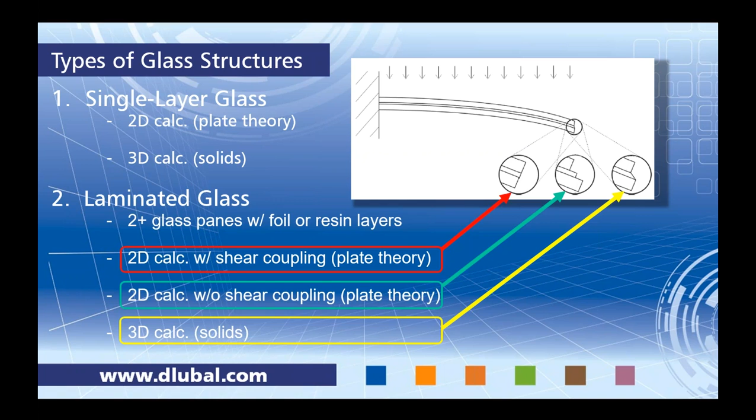Like I said, this is certainly the most accurate option. A downside to this, though, is that your solve time will be longer than typical plate theory.

This will always use large deformation analysis. With the other two glass types, we can do a linear analysis or a large deformation. Typically with plate theory, you're running a linear analysis. But for insulated glass, we actually only give you the option for 3D calculation with solid elements. That's because when you throw in this gas layer, there's really no other way to get the accurate behavior of the shear coupling between the glass layers with anything other than solids, meaning that plate theory with 2D elements is not applicable for insulated glass.

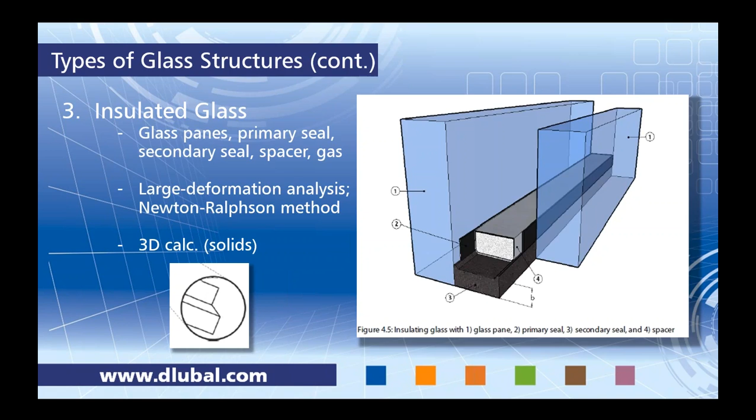So the first being a local calculation. That is where an individual glass surface is analyzed in RF Glass. Despite having any supports or boundary members drawn in RFEM, we have to redefine those supports and boundary members in RF Glass. With the local calculation, we can either do a 2D or 3D plate theory or solid analysis. And with insulated glass, this always falls under the local calculation because we can only do a 3D analysis type with insulated glass.

Now, the other option is a global analysis where the entire model in RFEM is considered. So therefore, things like supports and boundary members that were originally modeled in RFEM will be taken into RF Glass. The caveat with this is that we can only do 2D plate theory for this type of analysis.

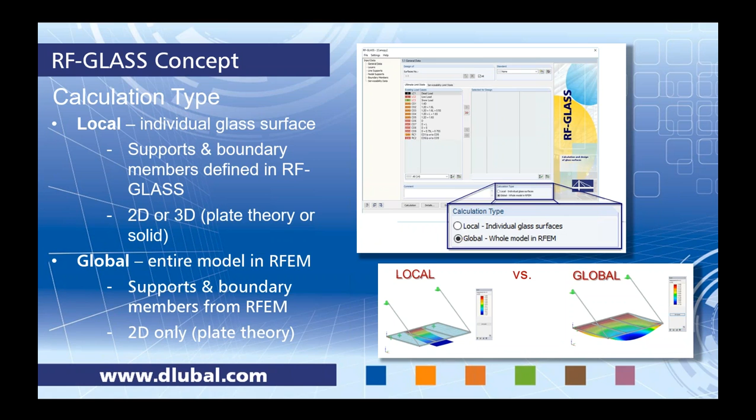So you're probably wondering, well, why would I ever want to do a local calculation if I have to redefine supports and boundary members? Two reasons for that. One, we cannot do a 3D solid analysis with a global calculation. So basically, if you have insulated glass or maybe very thick glass layers that a plate theory won't give you accurate results, the only option is to run a local calculation. The other reason is that the support types as well as the boundary members can be identified in RF Glass in much more detail than what you could ever do in RFEM. That's kind of the advantage. Again, we'll see that when we go through some examples today of local versus global.

So with that, we can jump into RFEM. When you begin a new model, you will see this general data box pop up. We just need to first give it a model name, so I gave it some arbitrary name. I have the load combination set to ASCE 7. You can see here that we have the Canadian load combinations as well as many international codes as well.

And then I have the checkbox to create those combinations automatically. I also always open up my template model. Any model can be saved as a template model, meaning that maybe you have your grid settings the way you'd like, your printout report, your unit set exactly how you want. So then every time you open this template model, everything is ready to go. You don't need to adjust anything next time when you open up a new model. So if I click OK, then this will go ahead and open up a new model for us.

And I'm not going to spend too much time today on modeling techniques. We're really just focusing on glass analysis today, but if you are interested more in general modeling in RFEM, we certainly have plenty more webinars such as this that are recorded on our YouTube channel.

So how I'm going to begin now is I'm going to draw a line element. You can see here that we have obviously a single line element, but we have many more options such as polylines, ellipses, arcs. So basically any CAD-like feature, you're going to find a lot of those in the program itself.

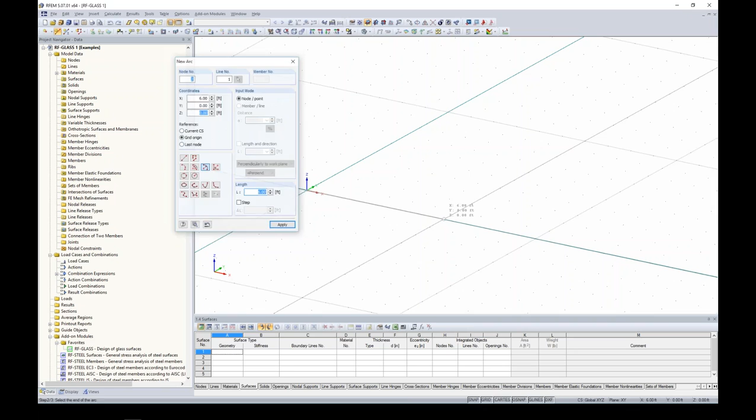For this option, I'm going to choose an arc by defining first my points at 0 and 0, and then I'm going to use my snap point to 6 feet. And then you can see now I want to define my radius. I want to actually reverse the orientation and define my radius at 6 feet.

So now I just have a simple line element. This isn't a member, it's just a line. And then I can actually select this line, right-click, and I can extrude the line into a surface.

If you were present in my last webinar on cross-laminated timber, the glass module somewhat acts the same way. The program is asking us now what material do we want to use when extruding this line into a surface. Realistically, this doesn't matter right now for glass. This concrete is just a placeholder. So it doesn't matter if I choose concrete, steel, or aluminum. It's just simply a placeholder.

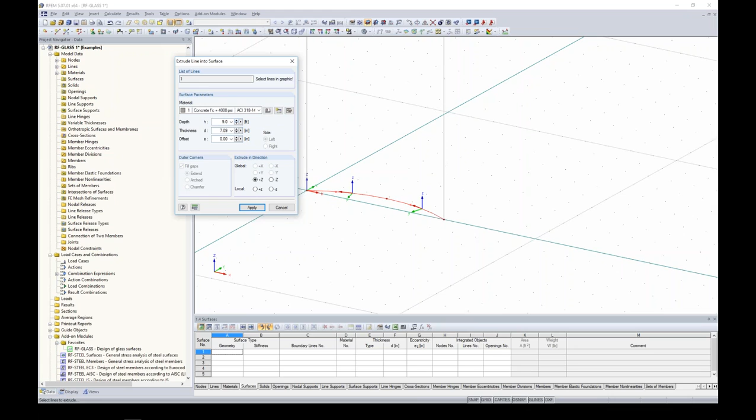The height, though, we do want to specify the correct geometry in the program, with the exception of the thickness. Thickness doesn't matter either because all of our layers and such we will be defining in RF glass. So if I hit apply, then I can see that I have this surface now created with just a few clicks of a button.

The next thing to consider is maybe we have some type of handrail on our glass panel here, and I don't want to model the handrail itself, but I'd like to create a line so that I can add in a line load to this surface.

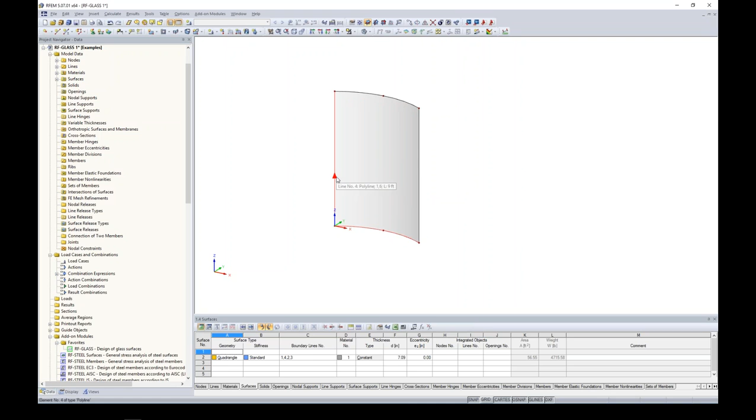So all I'm going to do is select this bottom line here and use my move and copy tool and move it up 3 feet in the positive Z direction. Now you can see that that line is integrated in that surface.

So quickly adding some load cases. Here I will go ahead and add my first load case, dead load, and you can see that the self weight is automatically checked on for self weight.

I'm going to create a new load case called wind load pressure. And you always want to define the correct action category, and the reason why is the program automatically created all of these ASCE load combinations. If you don't apply the correct action category, then you're going to get the wrong load factors.

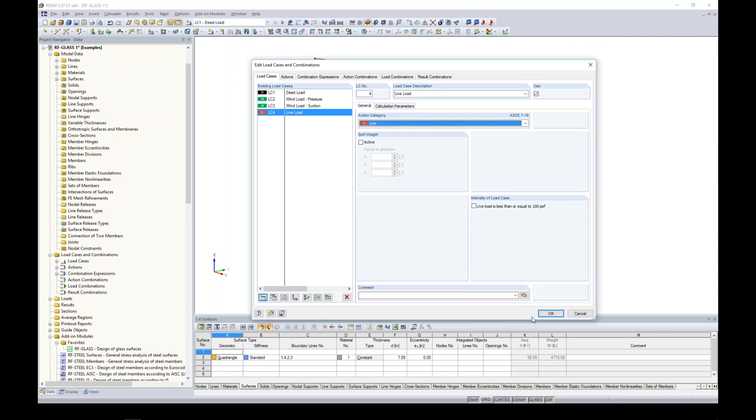So I'm going to make a quick copy of wind load pressure, but call this one suction, and then make one more load case of live load and give it the live action category. Okay, so I can click OK here. Now, if I go to my drop-down box, you'll see that the program automatically created all of those ASCE load combinations. I'm going to skip dead load for now.

We'll just consider self-weight, but wind load pressure, we want to add our first surface load on. If I right-click, I can turn on my local axis system, and I want to add a new surface load. Because we have a curved surface, I want to apply this wind load pressure on my surface in the local Z direction. And you'll notice down here the little picture updates depending on what direction you're applying your load to, which is nice. So in this case, I want the local Z direction.

I want my magnitude to be negative 0.03 KSF. And all I need to do is click on the surface and my area load is applied.

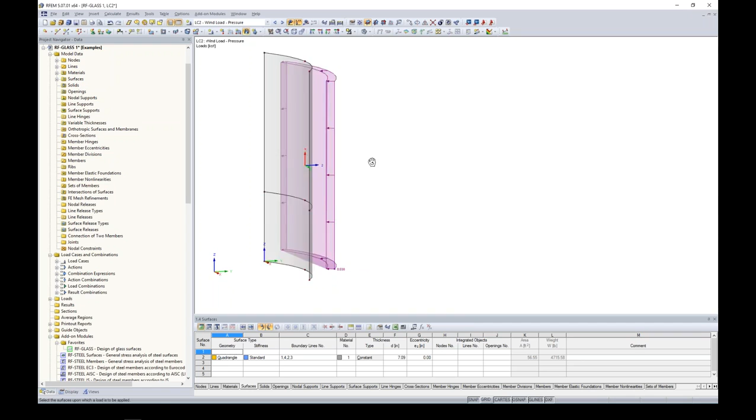I'm going to switch load cases to suction. I'm going to again add a new load in the local Z direction, but this time it will be 0.02 KSF on the other side.

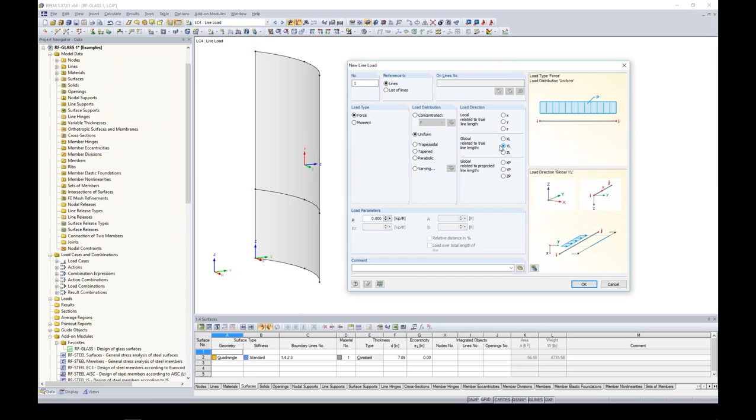And then lastly, we have live load where I will add in a new line load. This I'm going to apply in the global Y direction with a magnitude of 0.07. And then all I need to do is to click on that line.

So now we have all of our loads added to this surface. All of our load combinations are done. I want to check my finite element mesh settings. So if I go to calculate and FE mesh settings, the default is set at 1 foot.

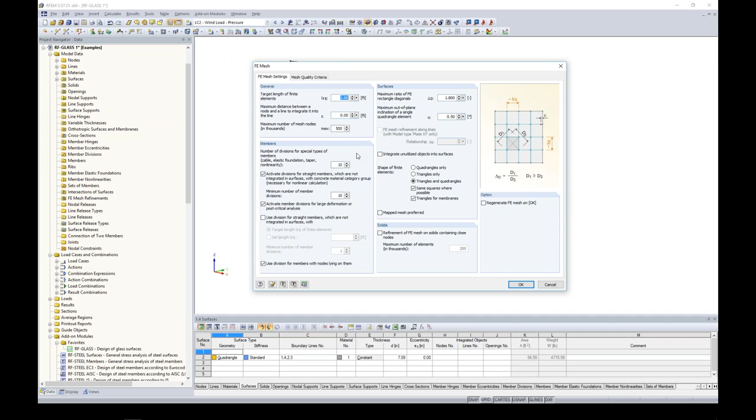The length of 1 foot would probably be okay in this situation since we don't have much going on in this surface, but it's only 6 by 9 feet, so maybe we want to decrease this to something more like 0.5 feet.

If I go to calculate, generate FE mesh, now we can see the FE mesh is automatically generated. Keep in mind this is different from other programs in that all finite element meshing is done automatically. If I were to move this line up an inch, everything would automatically readjust, so you never have to worry about manually adjusting the finite element model. Everything is done automatically.

Now we are ready to jump into our add-on module. We have this extremely long list of add-on modules, but if I right-click on any of them, I can select it as my favorite, which will automatically move it up to the top of the list. So now I can launch RF Glass.

Taking a look at RF Glass, as I mentioned, this add-on module is nothing more than a dialog box. You can see here that all of our load combinations were brought over from RFEM. The first question it's asking is what surface do we want to design, and you can check the all checkbox since we only have one surface.

The other thing to note here is that we do have the German annex for the standard to go ahead and do glass design. For us, we're going to be doing just an analysis, so we will choose no standard. There's a little bit of a translation issue right now, but don't worry, that will be fixed soon - this is 'none' in German.

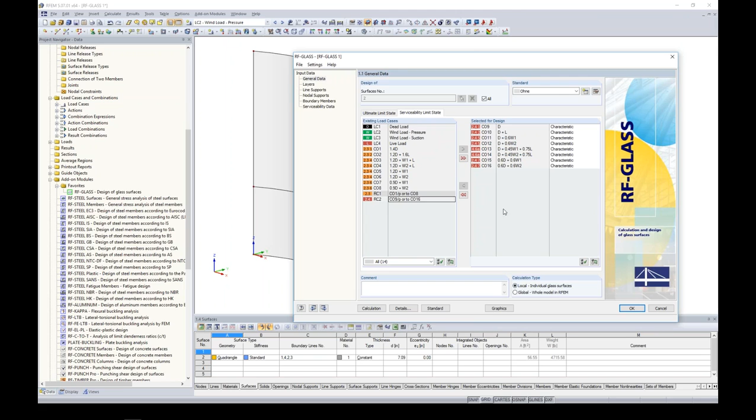Remember back to the PowerPoint, this is what we were discussing on local versus global. My two examples now will be local, so the first one will be local, individual glass surface. We'll focus on that and then get into global a little bit later.

With any add-on module, you simply work down the list. It's extremely intuitive to use - the program kind of sets up your workflow for you. So we're moving on to layers here.

It's asking us, okay, so we can create a new composition. You can rename this, and you can create as many compositions as you'd like for different surfaces in your model. For us, we'll obviously only have one composition for our one surface. We need to select which surface this applies to, and we can define our first layer type.

Our first layer type will be glass, and here will be the option to jump into our material libraries database. Typically the standard, when you select this, will be under the material category glass, and all of these options will be listed. We don't quite yet have the ASTM materials in there, but that's no problem at all.

I added this thermally toughened float glass to my ASTM standard. So anytime you add a new material, this will be remembered for any future files or models you create with this glass module. All of our properties are shown in the same dialog box, so everything is okay there. Now my thickness, I want it to be 0.2 inches - again, all of our material properties are shown to the right here.

Our next layer will be foil, and with this, believe it or not, we actually do have a lot of ASTM foil materials already integrated in the program. For this particular case, I will use 20 degrees Celsius at 1 minute. Again, the foil material properties are shown here. The thickness of 0.01 inches is fine.

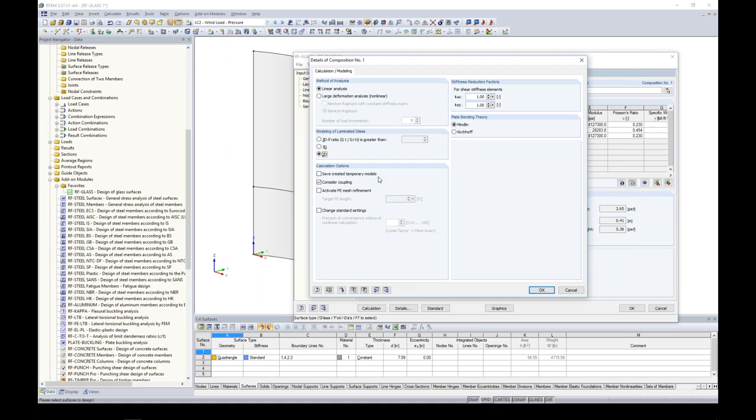Now, calculation options: save created temporary models. What is this? With our RF Glass module, which is a little different than a lot of our other modules, the program is actually creating a whole other model behind the scenes. By checking this checkbox, we can open up that model just like we would any other RFEM file to view how the program put all these layers together to create our glass surface. In our next example, I'll show you this, so it's nothing to worry about right now.

Consider coupling. Remember, with plate theory, we either have rigid coupling or no coupling at all. If I uncheck coupling, I no longer have the option to turn it to a solid analysis. Activate FE mesh refinement - this is if you wanted to change your FE mesh of this surface only, or any of the surfaces you define for this composition. This is nice because I don't have to go back into RFEM and redo my finite element mesh if all I want to change is simply the surface in here. So that's certainly an option as well.

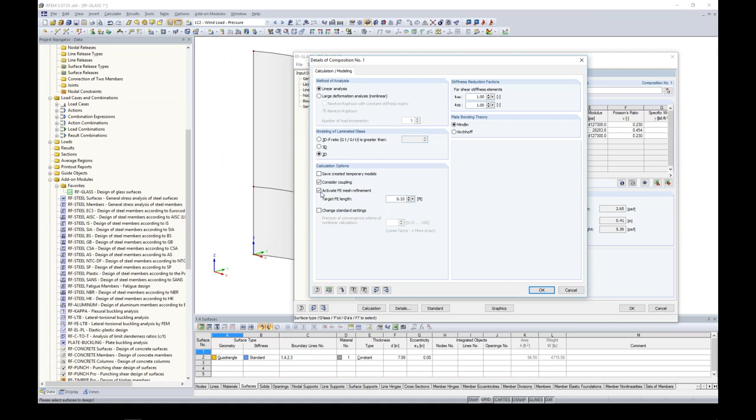Okay, also notice we get this nice picture here of the different glass layers. Depending on which line I'm clicking on here, this arrow will be synced with whichever layer is shown in this little diagram. Something important to note here: the local axis Z positive direction is facing towards the bottom of the glass. So this is the bottom of the glass, and know that the positive Z axis of our surface is also pointing towards the bottom of the glass. For this example, it doesn't really matter because we have symmetry between the top and bottom layers, but our next example will be different because we won't have symmetry.

So you want to make sure that the local Z-axis and the bottom of your glass are aligned correctly. All right, moving on down our list: line supports. In RFEM, I didn't define any line support, so if I were to try and run that model right now, I'd obviously get an instability because I have nothing supporting that surface.

So this is where I was telling you, in RF Glass we can go ahead and define these line supports. The first thing I need to do - and you'll notice here I have my picture, I can rotate it, I can scroll in - is to choose my first lines. So if I choose them graphically, using my AutoCAD type features of just dragging a selection box, I chose the left and top lines here.

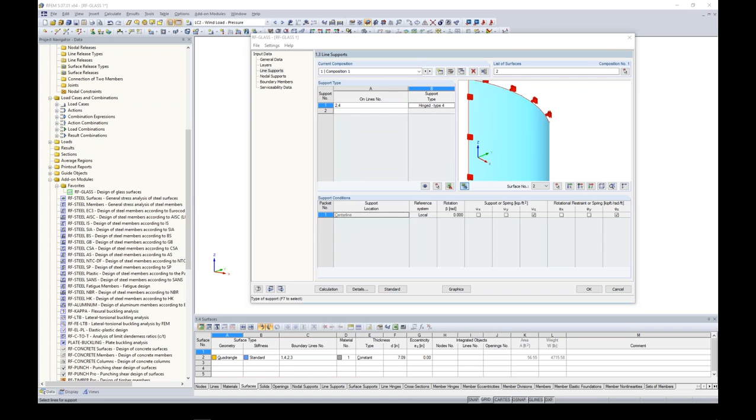And if I click on support type, you will see all of these different hinged options. As I scroll through these, you'll notice that the support types are changing down here. If this still doesn't make a lot of sense to you, you can always click on this help manual here, and what this does is bring up our manual for RF Glass. If you scroll down just a little bit, here are all these different hinge types.

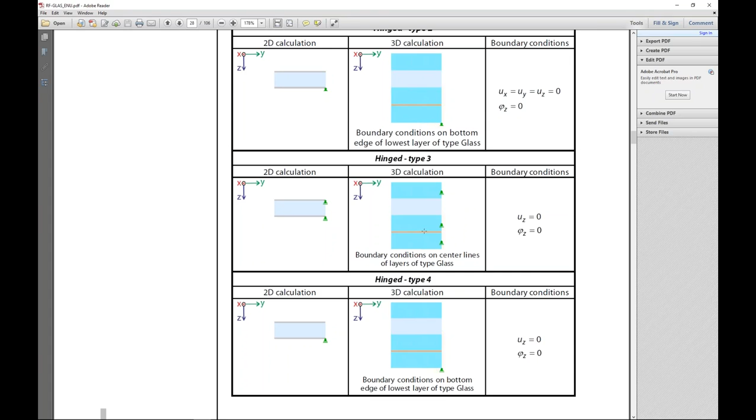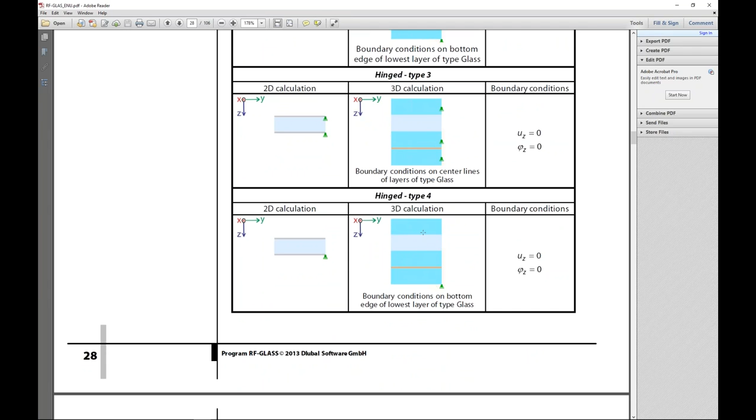It's nice because it's set up in a way that shows, okay, if you're doing plate theory under the 2D calculation, this is how the hinge type will look. Now if we're doing a solid model, this is how the hinge type would look for these different hinge types - hinge type 1, hinge type 2. So this is what I was saying, that the benefit of using a local analysis in RF Glass is that you can get very detailed in how your glass layers are supported. In RFEM, you don't have these options - you can do it, it's just much more complicated. So in RF Glass, it allows you to get a bit more detailed.

So for us, we will choose hinge type 3. Then I want to choose my other two lines here.

And I can always select a user defined as well. I don't have to use these already determined hinge types in here, and maybe I want to unselect translation in the X direction. Keep in mind you can always select springs as well, so you don't necessarily just have to have a free or fixed situation.

Moving on down the line to Nodal Supports, exact same concept. Just if you were to have Nodal Supports instead of line supports, this is where you would go ahead and define it. Boundary members - so it's not uncommon to maybe have something like a channel member up at the top here of our glass surface.

Well, I didn't model that in RFEM, and because I'm using the local glass analysis type, I want to define that boundary member here. So the first thing I need to do is select where I want that member to run. And you'll notice that everything is just set to center line because I'm using 2D plate analysis. I don't have any cross sections defined in RFEM.

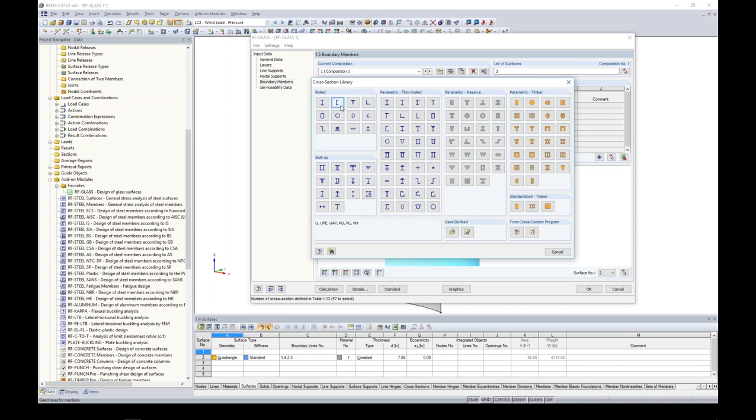Normally you would think, okay, I probably need to go back into RFEM, create some cross sections, but the nice thing is I can do everything from this add-on module. So up pops my cross section library. For this case, maybe I'll choose a type of channel here just for geometry purposes, and here are all my AISC shapes. Maybe I want a 3x5.

Concrete is obviously not the right material for this, so we can easily edit this as well and jump into our material database. Maybe we want something more like aluminum from the ADM. Well, I already have aluminum set in one of my favorites group for USA as 6063 T6. Here are all of my properties for that particular material.

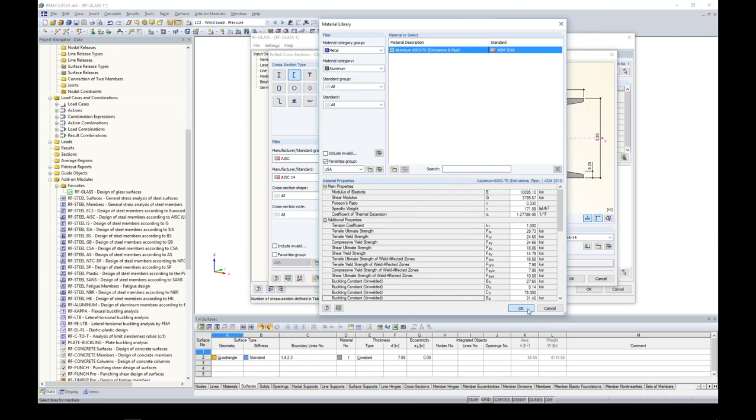I can click OK in all of these, and if I zoom in, I have a nice rendered shape of my channel. You can also rotate it if you need, and the program will automatically update that as well. So for analysis purposes, we certainly want to take into account the stiffness from this member here. That's the whole purpose of defining boundary members.

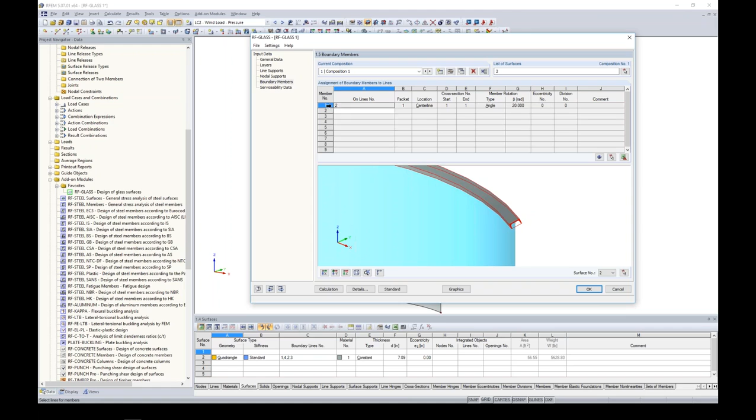Maybe you have a boundary member with nodal supports on either side instead of a line support. That can all be modeled in here as well. So this is just for example purposes. I will delete this for now.

And lastly, we will jump into the serviceability data. This is nice in the sense that if I go to my standard button down here, I have my serviceability limiting deflection ratios. I have 3 different types of combinations - characteristic, frequent, and quasi-permanent - and you can see that I can change these ratios for these 3 different combination types to whatever I'd like. Default is L over 100, and for cantilevers it's L over 50.

If I go back to my very first tab under serviceability, here's where those 3 different combination types fall into place. So if you want different limiting deflection ratios for these different serviceability load combinations, it's possible to do it in one analysis without having to rerun several times with different deflection ratios.

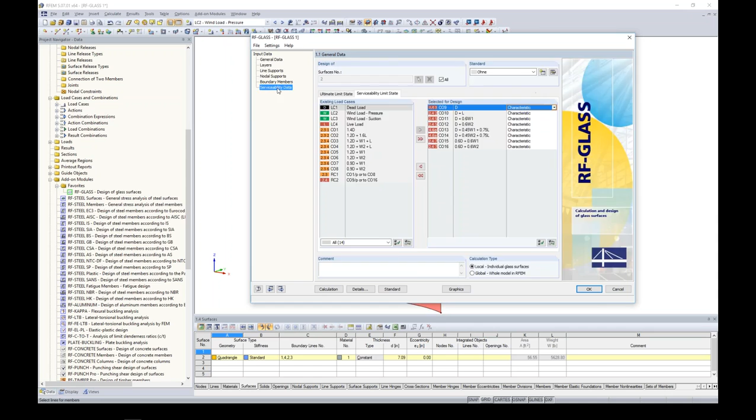The only thing I need to define is my surface. Now the reference length - do I want to use the minimum border line, the maximum border line, or do I want to define my own? In our case, a conservative option would be the minimum border line at 6.28 feet, and if it was a cantilever, I could check this option here.

Last thing to check is the details button. You can see that we have all of these options for what stresses we want to show in the final analysis. So I can easily uncheck any of these if I don't want to see them, or check them if I do. Under the results, there's a few other options for what you want to see in your calculations. For example, maybe we want to see line support reactions.

And with that, we are ready to solve. So what the program's doing now is it's taking each stiffness layer from the glass, creating a more global stiffness, exporting it back into RFEM, rerunning the analysis, now bringing all of the results back into RF Glass.

And now we have this results menu available. Here we can view our max stresses and our ratios by either the loading. So we have our different load combinations, load combination number 1, number 2, number 3, and remember this is ultimate limit design. We also have our max stress ratio by the surface.

We only have one surface defined, so of course we only have surface number 2 shown here. And then we have our max stress ratio by the composition. We only have one composition defined. With this, we will get our different stresses for the different layers, layer number 1 and number 3. We have our existing stresses due to the actual load combination, and then we have our limiting stresses. And of course, we get a ratio.

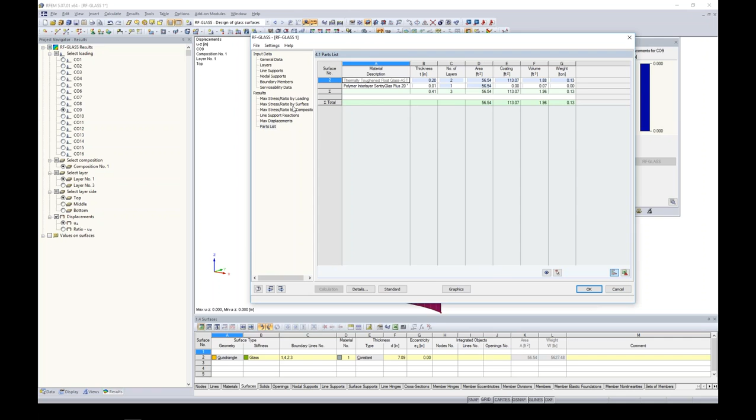And lastly, we get a parts list or material takeoff for the surfaces that we defined in this add-on module. Jumping back to the max stress ratios by either loading, surface, composition, there's another option down here called graphics.

And with graphics, this will immediately bring us back into RFEM. Here we can view the different stresses by contour lines. You'll notice that the results option popped up here in our project navigator. If I look up here, it shows me that I'm still under RF glass. Even my drop down here shows me I'm under the results of RF glass, and here I can easily jump right back into that add-on module.

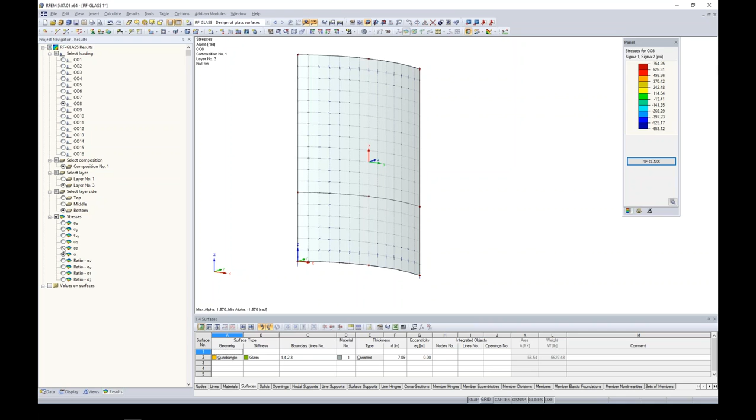So it's nice here if you want to visually see what's going on with these different stresses. Okay, so that concludes the first example.

Now, for the second example, I'm going to use this same surface, but I'm going to turn this into an insulated glass example. Time savings, the geometry is already created, the loading's already created, and we're just going to see a lot of the similarities and differences between a 2D plate theory versus like an insulated glass solid model.

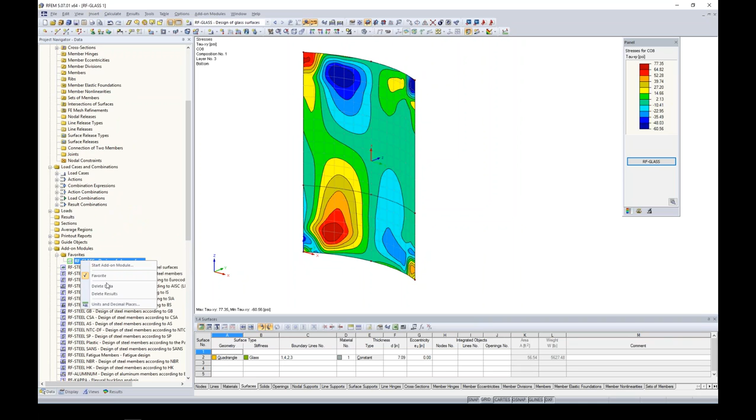I'm back in my data tab under my project navigator, and what I can do is to actually just right click here on RF glass and delete all of my data. It's asking me, do I really want to delete this? Yes, I do, and we are back to square one with just a simple glass surface is what it's shown now.

So here I will launch my RF glass again, and we don't need to spend much time on some of this. One thing I do want to do real quick that I forgot, let's go back into our load cases, and I want to create one more load case here called climatic load. This is for my gas pressures of my insulating glass that I'm about to create.

I'm going to create a new load case here called self-straining force. You certainly can put your climatic loads into any one of these load cases that you want, but keep in mind, maybe climatic loads you want a load factor of 1.0. When you put it in with dead load, well, now it has the same load factors as dead load. So most likely you're going to want to keep them separate from these other action categories, which is why I created climatic load. This does have a load factor in our ASCE load combinations of 1.0.

So I can launch RF glass again. Now you can see that my load cases are a little bit longer. I now have this T for temperature included in here as well. So for ultimate limit state design, I'm choosing all of my LRFD equations, and for serviceability, I will choose all of my ASD load combinations.

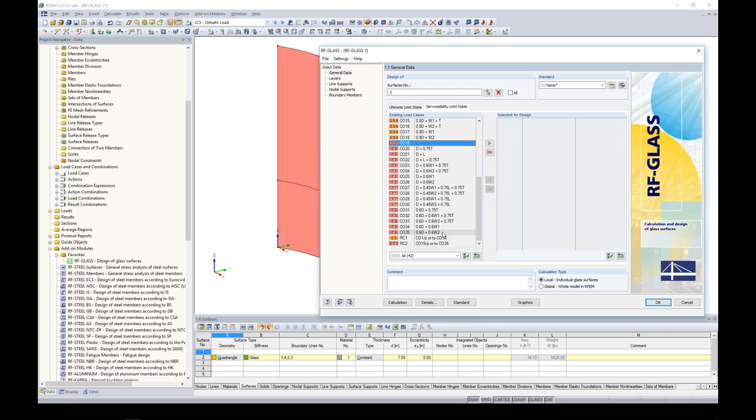We are still going to stick with the German none here for our standard, and the calculation type will be local. Again, this is another local design, but you'll see here under layers that we want to first choose our surface. Nothing new here. Now our first layer type will be glass. The program remembers the ASTM. This time I want a thickness of 0.06.

0.6, and then I want to create my next layer of gas. The minute I put in a gas layer, the add-on module says this has to be a solid analysis. I can no longer do plate theory. That's just a limiting effect. When you choose gas, there's no way to do a plate analysis.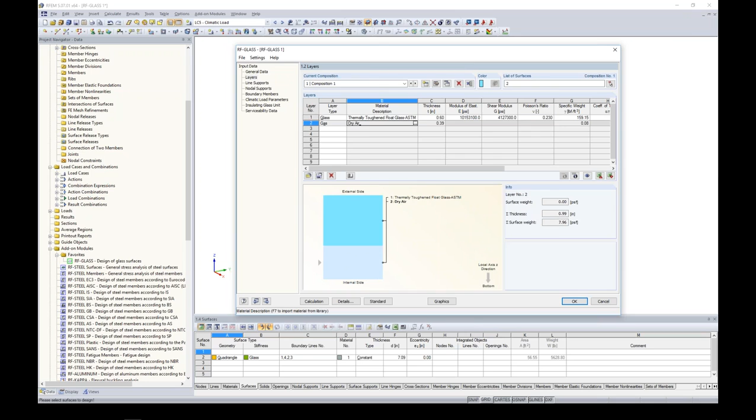For my materials library, for my gases, these are the options already default in the program. Argon is a pretty common one for insulating glass. Here are our properties, shown here.

Maybe I want my thickness to be 0.65. I'm going to choose another glass layer of 0.50, and then a foil layer, we'll keep it at 0.01, that's fine. And lastly, one more glass layer at 0.5.

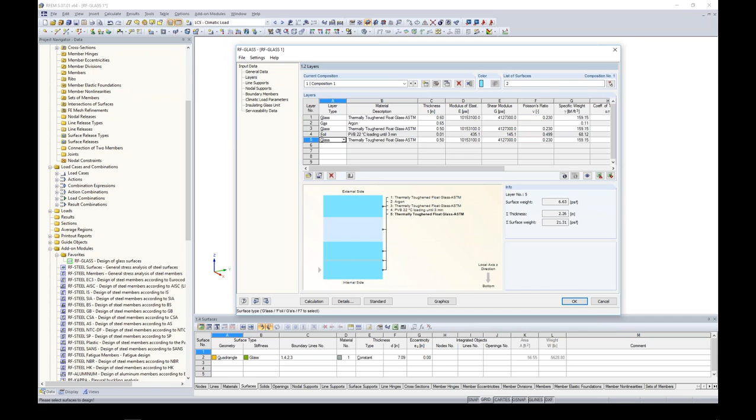Now let's take a look at our details of this composition. You'll notice some changes in comparison to what we were viewing last time. Linear analysis is no longer an option. We only can do large deformation analysis. As I mentioned, Newton-Raphson is the type of large deformation analysis we will do.

You do have the option here to choose a constant stiffness matrix. This will obviously speed up your calculation time a little bit, but maybe not as accurate of results, because you're not getting that nonlinear behavior with the different stiffness matrix for each iteration. It's up to you which option you'd like to choose.

Number of load increments runs parallel with our finite element mesh. Anybody who's done finite element modeling knows that if you have an extremely large mesh, you can get very inaccurate results. However, if you continue to submesh your elements to something very small, your solve time also increases, and at some point your results aren't going to change very much. It's the exact same thing with load increments.

Maybe one load increment won't give you the correct results, but maybe 10 load increments is too many. It slows down your solve time, and your results aren't any different than what 5 load increments would have been. Default is 5 here, but you can certainly feel free to change this if you'd like.

Modeling of laminated glass, we only have one option because we have insulated glass. And then the calculation options, this is where I want to show you save created temporary models. I think it's a very cool thing that this add-on module does in the background, so we can actually view the glass panel after we're done solving.

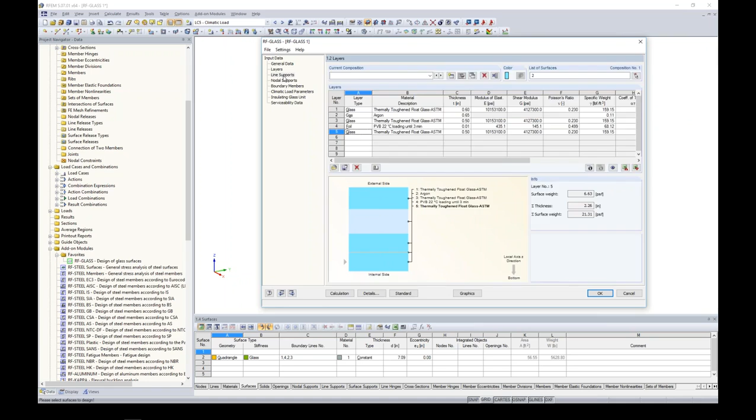Remember what I said with the local z-axis direction pointing towards the bottom. Most likely this is going to be the internal part of our surface, our glass layers. And if I were to double check this, everything looks okay that the local z-axis is at the bottom here. Moving on down the line, supports — nothing new here for the most part, so I'll quickly run through this.

There is one thing that I do want to show you. If I choose hinge type 3, just like we did last time, you'll notice now that I have 3 different layers, whereas before I only had one option. So with solid elements, if I zoom in here, you can see now that I have these different solid elements where I can apply these nodal supports at the different layers.

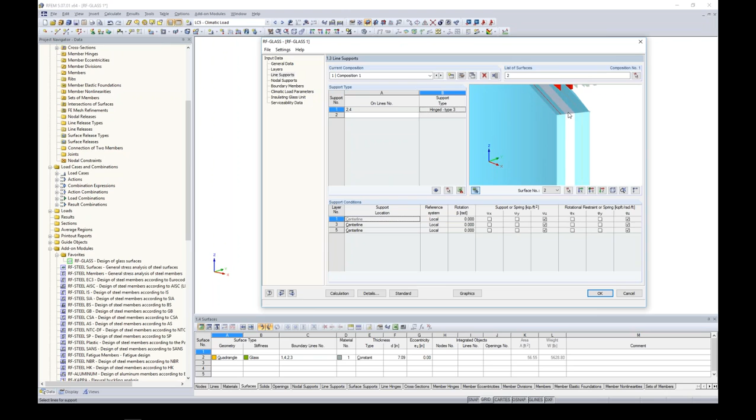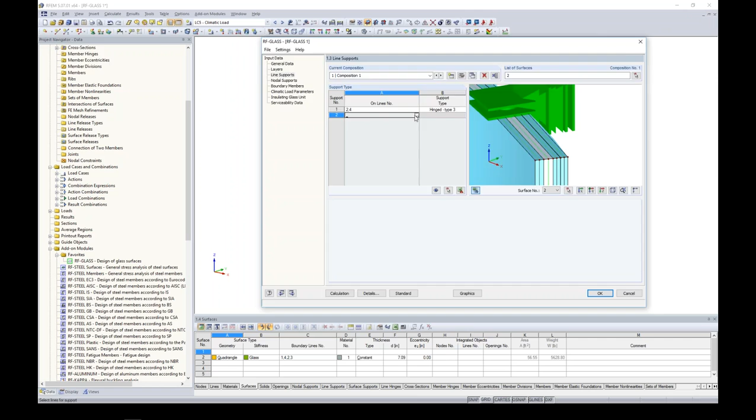As I scroll through here in the table, the little picture updates on which layer I'm at. So that's nice, that everything is synced here so that I can see how exactly I'm applying these nodal supports — sorry, these are line supports we're in. Same thing with the bottom line and the right line.

Maybe we want to choose user defined here. I'm going to release translation, but now I need to do it for all 3 layers. Nodal supports, same setup — if we were to have nodal supports, we will skip this for now. Boundary members, same concept as well.

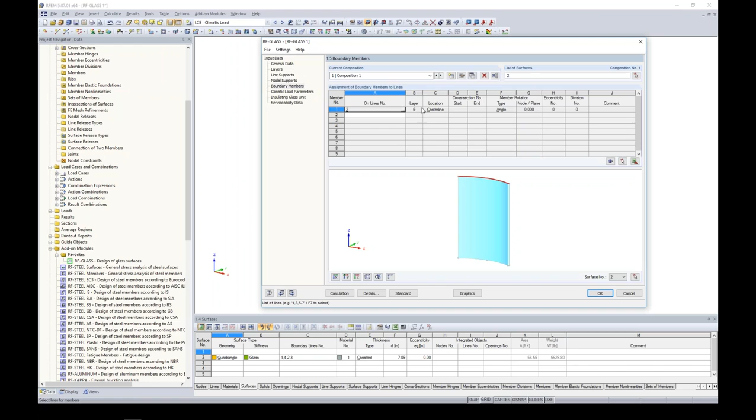The one thing I did want to show you, though: if I choose the top line again for, let's say, that channel, now I get to choose which layer I want to place that channel on. Again, scrolling down in here, if I choose layer 1, the picture down here will jump to that layer. I can also then choose upper edge, center line, or the lower edge within each layer of where exactly I want to place that boundary member.

So this is what I was saying, that RF Glass allows you to really get detailed, especially with this solid model, and how exactly these supports as well as boundary members are framing into your glass panel.

Again, RFEM would not allow you to do this very easily. This is just for demonstration purposes once again, so we will delete this row.

Climatic load parameters - this is something new that popped up when we defined a gas layer. We probably need to take into account some climatic loads. Now, there is this checkbox here, automatic gas temperature calculation.

If I check this, you'll see we get some very complex variables here. Realistically, unless you're a glass expert and you really know what you're doing, you probably will never have this checked on. This is all kind of behind the scenes, but it does give you control over some of the variables if you want.

I do have a document write-up. If anybody wants to see this, feel free to email me and I can give you more information on this, but I'm not going to cover it now.

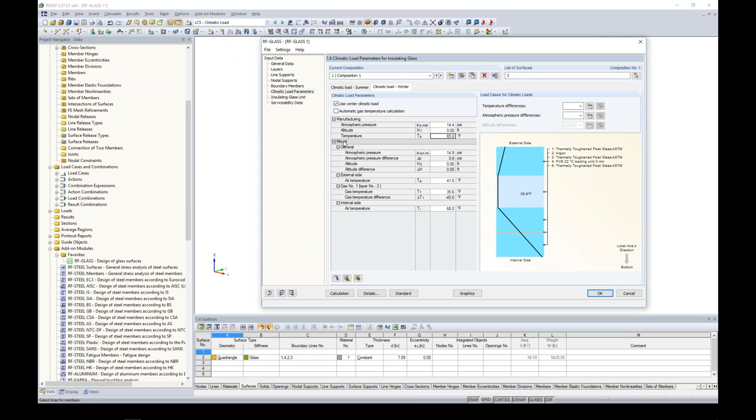Climatic load winter tab up here. Everything's exactly the same. The only thing we need to do now is define our different temperatures for winter. So maybe the temperature in winter at sea level is 65 degrees year-round. Mounting, however, where this will end up, the altitude will be 2,000 feet. The external air temperature can get down to 20 degrees. The gas temperature, 35 degrees is fine. The internal air temperature, let's say, can get down to 62 degrees.

Now, again, for winter, we need to go ahead and set our load cases. The program obviously knows that we'll never have summer and winter loads together, so it will actually create separate load combinations for summer versus winter. That's something you don't have to take into account - the program's smart enough to know that.

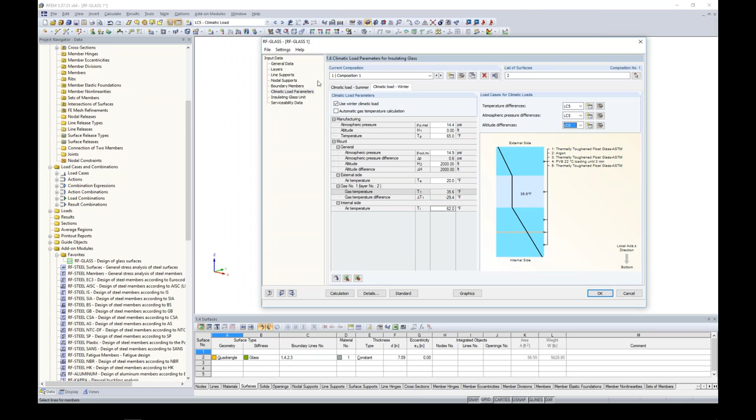Moving on down the list, insulating glass unit. So here is where we can consider our secondary seal options. For this, I want to jump back into the PowerPoint quickly because this is actually a little bit more complicated than what you would initially think. For a secondary seal, now there is the option - this is exactly what we were just doing, what you just saw in the RF glass module.

So if I had this option unchecked, there is the use helper supports on gas layers - that's now grayed out in the program. So what exactly are these helper supports, since there's not much information in the add-on module itself? Well, when I have the secondary seal unchecked, meaning there's nothing there, these helper supports will be applied on our glass surface. Taking a look at this picture down here, glass panels are pretty stiff, maybe around 10,000 KSI.

However, RFEM will model a soft material at either end, something closer to 1.5 KSI. Now, when we don't have these helper supports applied, we get some sort of deflection that maybe looks like this. This is obviously not desired behavior. This is from the gas pressures, and then we're getting our deflection at our sides.

Now, when we add in these helper supports, we add stiffness to the ends here, and we'll get more of a desired deflection with our glass panes. So that is the whole purpose of these helper supports.

For us, we will leave this unchecked for now, so the helper supports will be used in the background.

The number of finite element layers in gas layers - our gas layer is only 0.65 inches deep, so 2 layers is probably fine for that. If you had something larger, you can always increase the number of layers. This is something that I think is pretty cool for this add-on module.

Force load distribution - you can see my 5 load cases here, and we give you the option to determine what percentage is applied to the external glass versus the internal glass. Dead load, we only have self-weight, so maybe we want to apply 50 and 50 to the external and internal. Wind load pressure, we want 100% on the external side of this glass. Wind load suction, we want 100% on the internal. Live load, it's a handrail, so maybe we want 100% on the internal. Climatic loading, maybe we want 50 and 50. So a little bit more control on where exactly these loads are being applied to your glass surface.

And lastly, we have our serviceability data. Here we can just select the surface. It's applying it back to those service load combinations and the ratios that we've set here.

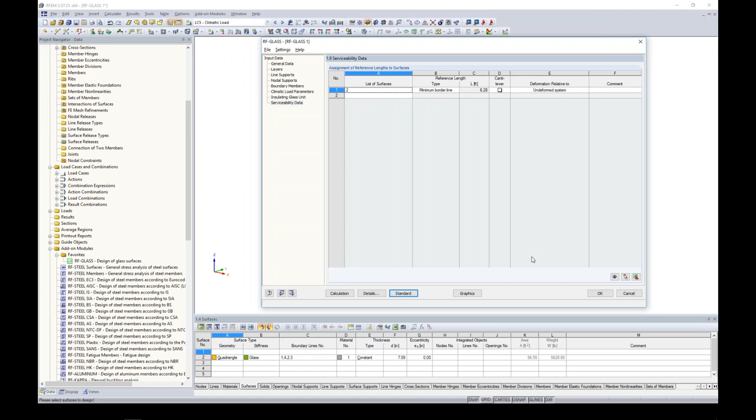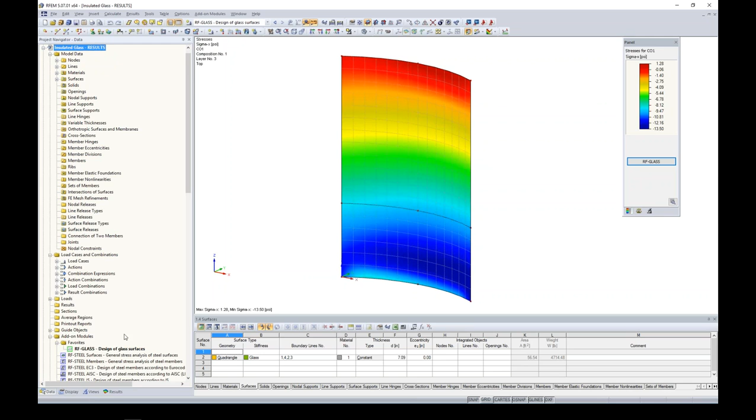With that said, we are now ready to run an analysis. As I mentioned before, a solid analysis takes much longer than typical plate theory, so I already went ahead and ran this result because we don't want to be sitting around for a few minutes with nothing to talk about. So here are the results for this exact same model we were running. Let me open back up my RF glass module, and this is what it should look like once we are done with the analysis.

Nothing really too different from our plate, obviously we're going to have more layers here for our stresses. You can see my max ratio is 0.99 - maybe for design this is a little bit high, we wanted something more like 0.9. Regardless, we still get our green smiley face because we are under 1.0. Again, feel free to export any of this data into Excel.

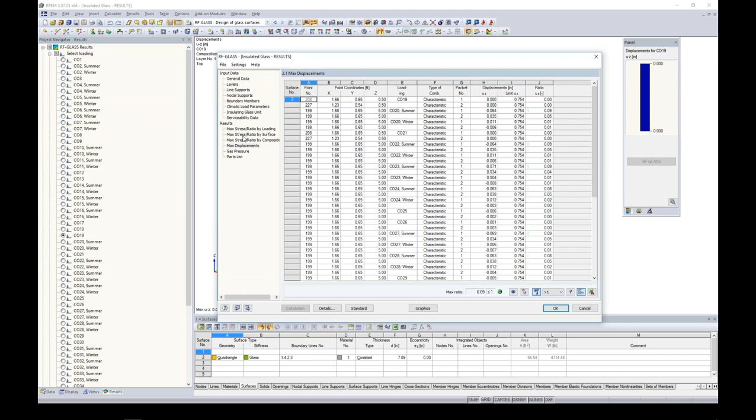Pretty much the same thing you would see before. The one thing I did want to show you is under gas pressure, for example, you can see the loading CO2 summer, CO2 winter. Like I said, the program creates 2 load combinations, one for summer and one for winter, and here you can see all your different gas pressures.

Jumping back to one of these stresses here, we can see our stress diagram. Now we have our glass layer, gas - we obviously won't have any stresses - and then our other 2 glass layers. So with this, we get the accurate shear coupling behavior based on the stiffnesses of our intermediate layers, which you can see is modeled quite nicely with these diagrams for each layer.

Jumping to our graphics, again we have control over what stresses we want to see graphically based on the contours. So nothing too different, essentially, than what we saw for the results from our plate theory.

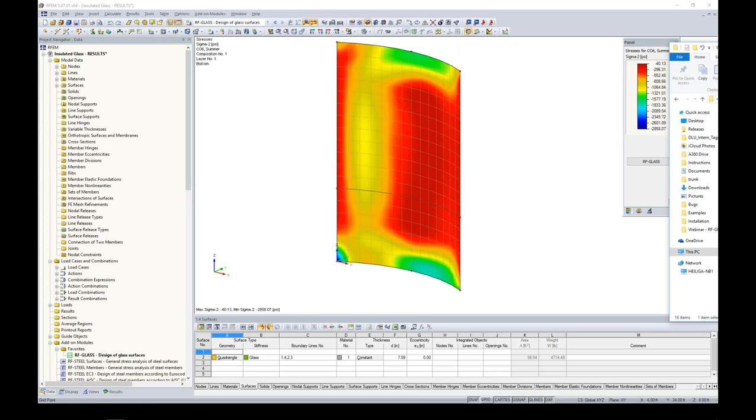Remember how I checked that checkbox to save the model in the background that it's creating? Well, let me show you my desktop. Here are the model insulated glass results. I just saved it to a folder, and automatically the program created these 3 models as well. I had nothing to do with creating these; they were created behind the scenes because I checked that checkbox.

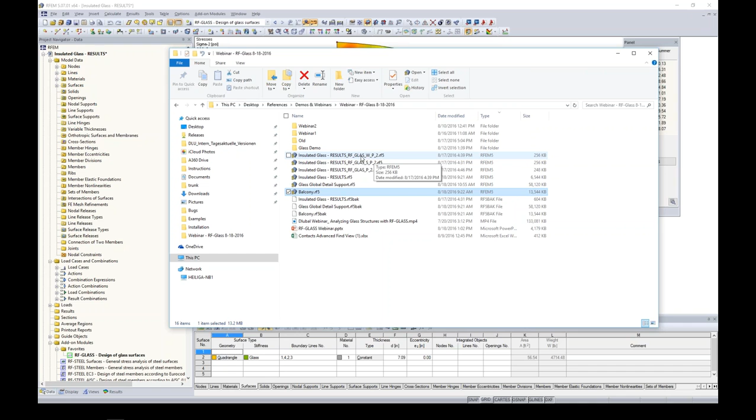You can see here we have W for winter, S for summer, and then a third option which doesn't include climatic loading. If I open one of these, let's say the winter one which I already have pulled up, this is what I was talking about when I said it creates this model in the background. I can zoom in here and see my solid elements.

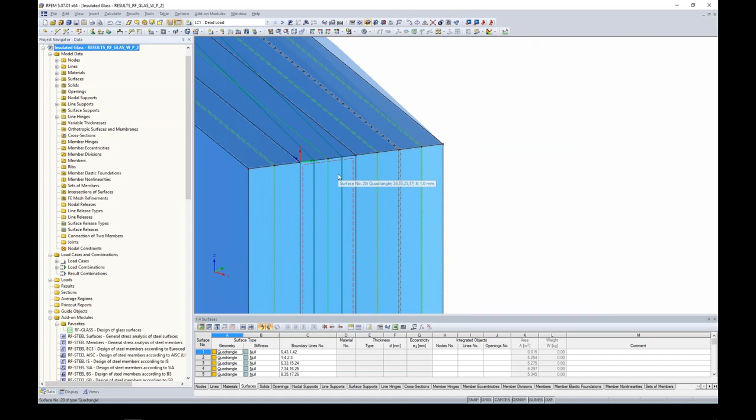I have my first solid for my glass layer. There are 2 layers here. If I zoom in really close, here's my foil layer, here's my other glass layer, here's my bigger gas layer, and then I have my other glass layer. I can turn this into wireframe too to see what's going on.

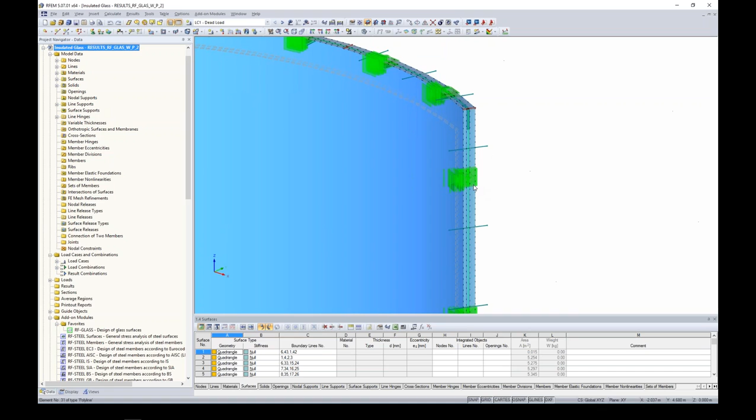Now the other thing to notice are the supports at all the different layers. This was everything that we defined in RF Glass. Like I said, you could sit here and model this in RFEM, but it's going to take a while, whereas in RF Glass you just give it some properties and the program creates everything automatically. That would even include our climatic loading.

If I show you now our new LC5 for climatic loading, we now have these surface pressures on our glass unit. So this is what's going on behind the scenes - the program is automatically creating this solid model for us. I wanted to show you exactly what that checkbox does when we want to save and see these models. Okay, so that concludes the local calculation types.

So probably everyone wants to know, well, what about the global? Maybe some people are a little more interested in that. Well, let's take a look at this example here. This was modeled by one of our glass engineers, and I'm going to quickly turn off the FE mesh and our FE mesh refinements.

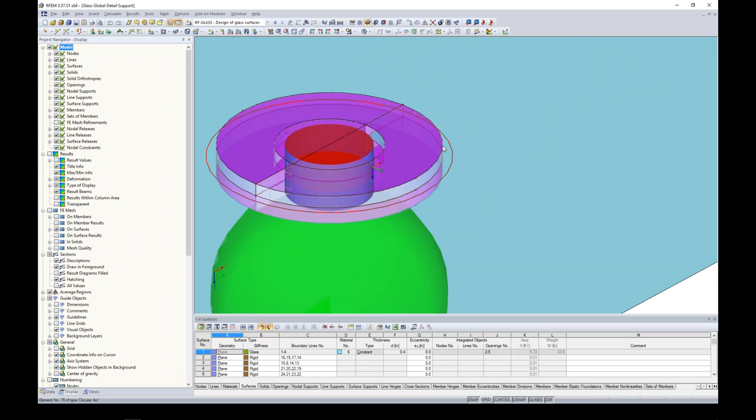You'll notice here people often ask, well, can you put holes in your glass? Yes, that's no problem at all. You can see here this is a glass surface and we modeled a hole in it right here. Now what we also did was go ahead and model a contact element, a contact surface.

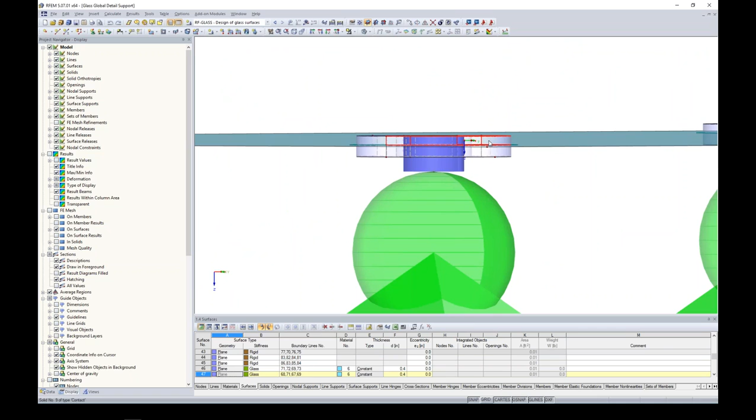So this top one, if we click on it, is a rigid surface. If I click on this middle contact surface here - sorry, let me zoom out. If we go into an elevation view, this is really an exact model of how this support will act with this glass panel. If I double click here, I have a contact surface.

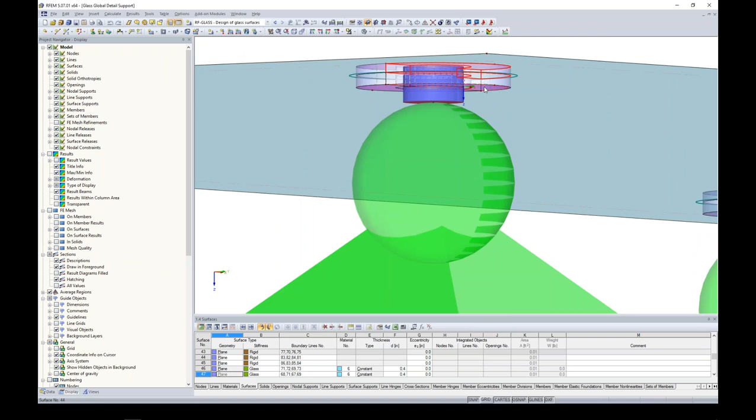I look at my nonlinear settings here - I have failure under tension. So basically this contact support will fail if any tension is experienced. And again, on the bottom we have another rigid surface. So this is just a more detailed modeling of the glass and its supports.

This is something that you obviously can't define in RF Glass. This was modeled in RFEM, our main program. So let me show you the finite element mesh too - let me turn that back on. This is pretty powerful as well.

So the finite element mesh you can see here is set at some arbitrary number. But the other thing that we did is we went ahead and added some finite element mesh refinements here, and that's what these circles are about.

If I double click on one to take a look at it, we made a finite element mesh around a node. We set the inner length to something very small - full precision shows it's at 0.0003 - and then the outer is 0.02 feet. So the program will gradually increase so that we have this smaller finite element mesh at the node here, which is kind of required because we're getting some small elements here.

Jumping into our RF Glass module, you'll notice under the general data - and I already ran the results for this - but I now have global selected. And if I have global selected, take a look at the input data: I have a lot less options here.

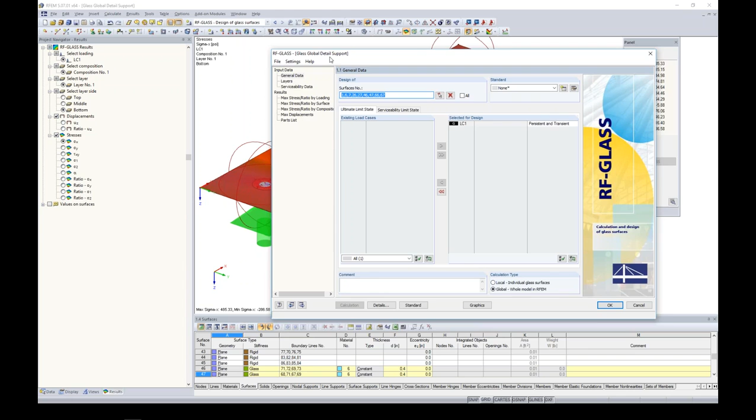I don't have the options for nodal supports, for line supports, for boundary members. I have no climatic loading because I can't analyze any type of insulated glass here. With global, remember that we can only do a plate analysis. So basically what the program's doing is taking all of our supports, all of the boundary elements, from RFEM into this.

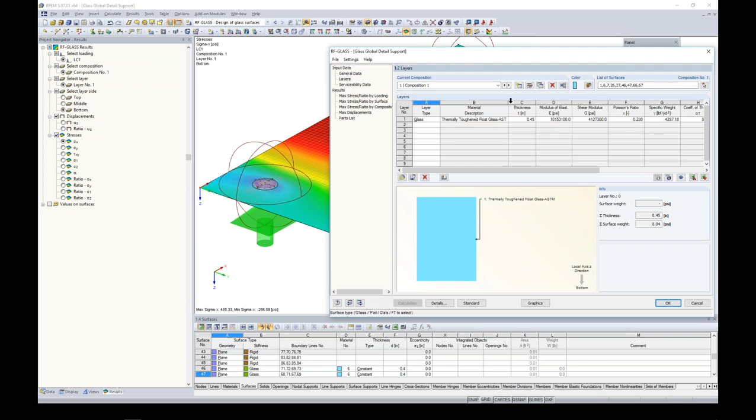The only reason now that we're really using RF glass is to get the correct stiffness for our different glass layers. With this case, we only have one glass layer, thermally toughened float glass, so nothing too complicated here. We still can set our serviceability data according to those ratios, and then we can run our analysis.

We still get our results here for our glass layer. Again, we only have one layer, so that's why our stress diagram looks as such with one layer. And basically, we have the same output type as what we saw before. But keep in mind that this is a 2D analysis.

If I go back to layers, I wanted to quickly show you this. Notice that all of the 2D, 3D, nonlinear analysis options are all gone now with global. You no longer have any of those options. This is a 2D analysis, linear analysis.

Okay, so I can also jump back into my graphics, and we have these nice contours now of our different stresses. Maybe one thing we want to do is to make a section cut through one of these.

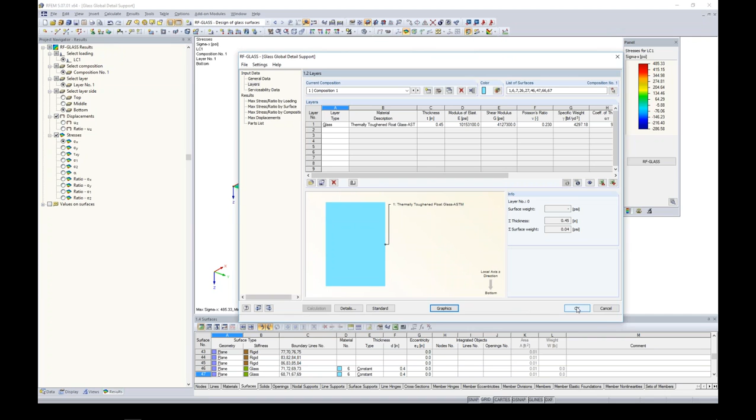Let me go back to graphics here. Okay, so we can create a section cut. I don't know why it's not letting me do that. Oh, probably because I need to go to the results. Sorry about that. Okay, so choosing one of these section cuts, maybe I want a little bit more detail through these supports here because the contours are nice, but we don't really get any numerical results.

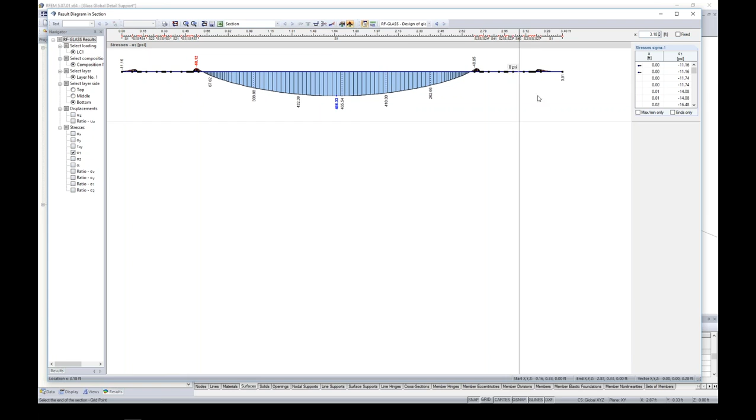Well, here we can go ahead and turn on, let's say, one of our normal forces, sigma 1, and then you can turn on any of the stresses that you like. Here you can view it across that surface where we just made our cut for numbers instead of just purely contours.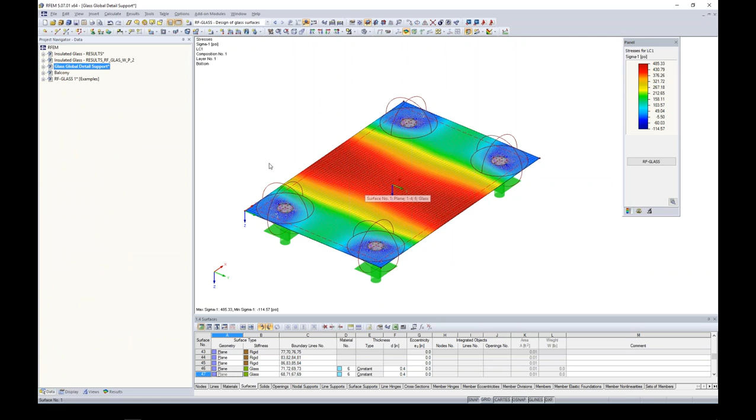And the last example that I want to show you guys, which is probably something you have maybe a full building modeled and you just have a glass balcony or a glass partition that you want to analyze with the rest of this building. So rather than this single glass panel here, maybe you want something more such as this.

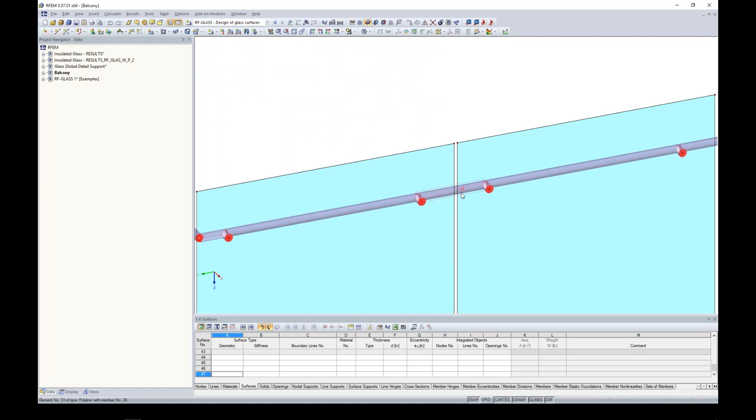This was modeled by one of our other engineers. It's basically a glass type balcony. You can see here if I zoom in, I have my different glass surfaces. There's a little gap modeled between them. We even modeled the handrail attaching to the glass surfaces by a single node. Then we also have these nodal supports at 4 different points.

I can decrease the size of this so that we can see it a little bit better. I have these nodal supports at 4 different points along the glass. We modeled in a little member to take into account eccentricity. So this might be something more of an application where you have a bigger structure, and you don't want to sit there and just model one glass element at a time.

Keep in mind, though, you can always do a local calculation within a larger model. That's certainly possible. You don't have to have just a single surface in one RFEM model. So I could do a local calculation on just this single surface here. So for this case, though, maybe we want to do more of a global analysis.

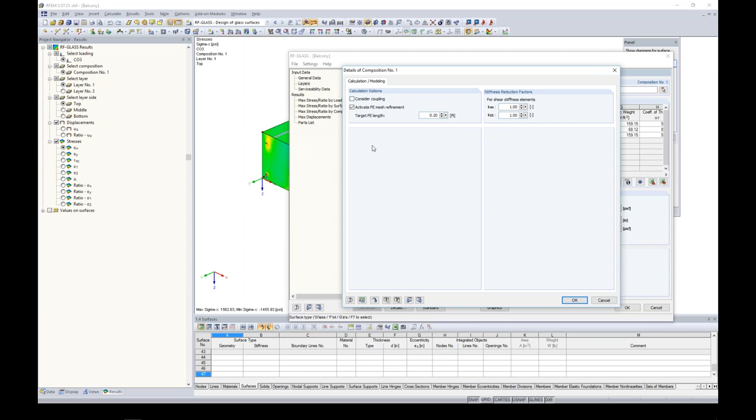I launched my RF-GLASS add-on module. You'll notice here I have global selected for the whole model in RFEM. Similar to what we saw before, this time I didn't consider coupling, so we'll see how the stress diagram is influenced by that. So we have no coupling behavior between the different glass layers. Again, we have no option for 3D solids or nonlinear analysis because we are now in global.

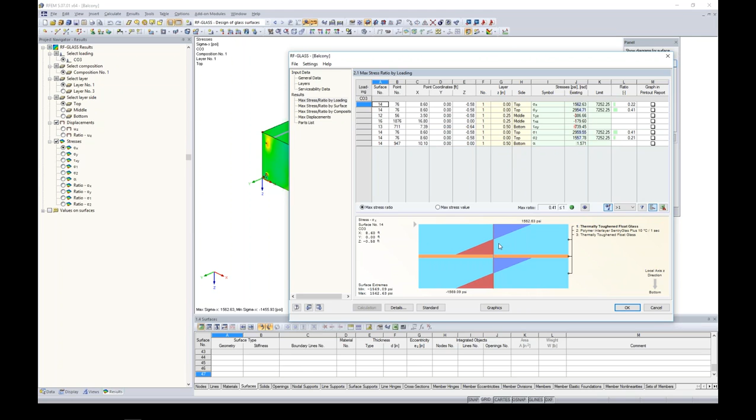Here, though, are our different glass layers for laminated glass, serviceability data, everything's the same here. Now, taking a look at our results with a max stress ratio by loading, surface, or composition, here's where that no coupling behavior comes into play. Normally, we'd see a stress diagram similar to this top layer throughout the entire depth if we had rigid coupling considered. But we have 0 coupling considered, so we have no interaction between the top and bottom layers. So that's why our stress diagrams are completely separate here.

Again, I can view everything graphically for my different stresses, which is nice and beneficial. If I were to do a local analysis of one glass surface, I would need to take into account maybe the stiffness of this handrail coming in as a nodal support, so it gets a little bit more complicated. And then maybe I need to set these nodal supports with this eccentricity taken into account.

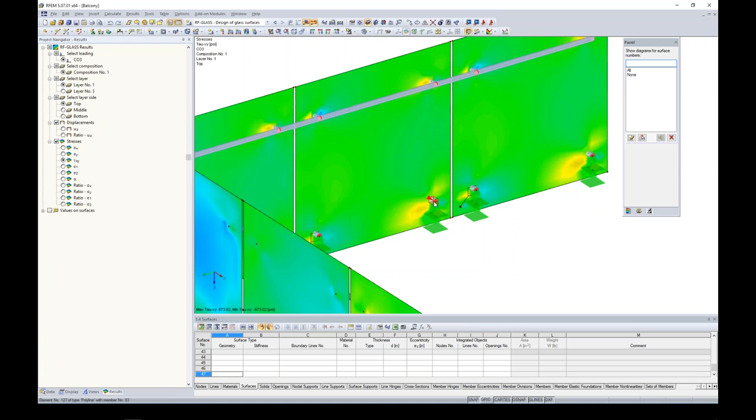So there's certainly some benefit to a global analysis, but if you have very thick layers of glass, a solid element would give you better results, or if you have insulated glass—which in this case you obviously wouldn't have—just keep in mind that global is not always an option. But for a situation like this, maybe it's perfectly fine to consider plate theory, and then we get our results for the entire structure.

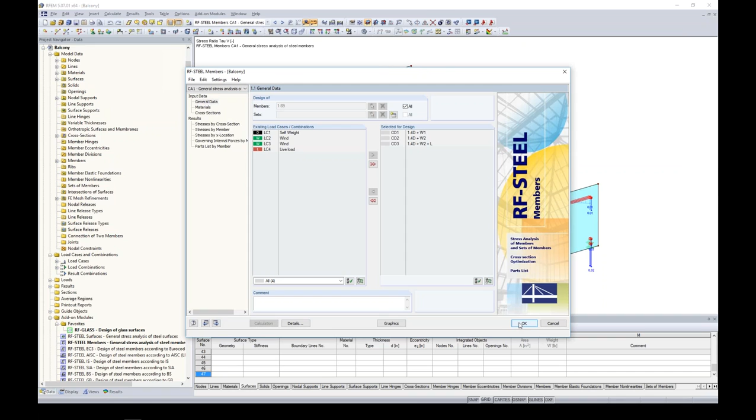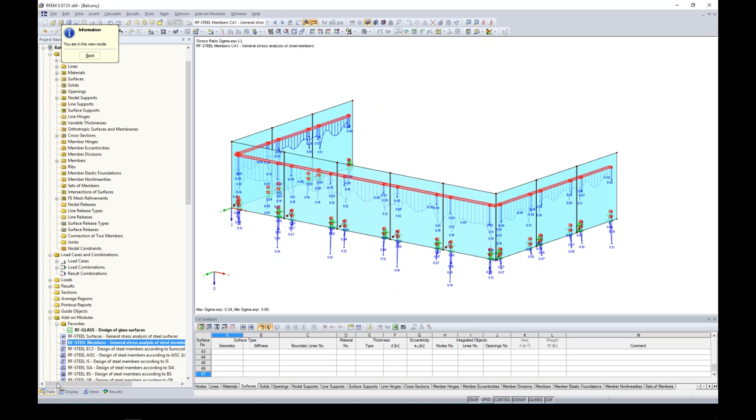Then the other advantage to this is tying it into other members in the model. For example, let's say we wanted to take a look at the results of our steel handrail. We have another add-on module called RF-STEEL Members that will basically give you a stress analysis of a steel section, comparing the demand stresses to the limiting stresses. With that, we can now view the results graphically of any of the stresses and stress ratios for this handrail. That's what's nice about tying this into the rest of the model with a global analysis. That sums up the global options here.

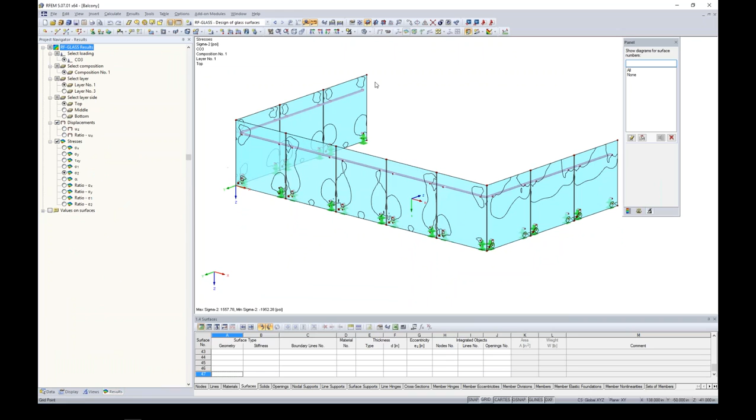One quick thing I wanted to show you, which I think is pretty powerful—let's jump back to our results for RF-GLASS. Let's say we wanted to print off all of these different pictures of our stress contours. Normally in a lot of other programs, you would need to take a picture, put it in your printout report, come back, change a view, take another picture, and put it in the report.

For us, we have this option called mass print. If I go into the details of this under my results, I see all of the results I'm viewing, and now I can select all of these stresses, including my ratios. If I click OK, maybe I need to set the size of my picture—I can set it at 50% of the page, that's fine. I click OK, and the program automatically creates all of these pictures for us and puts them directly into the printout report.

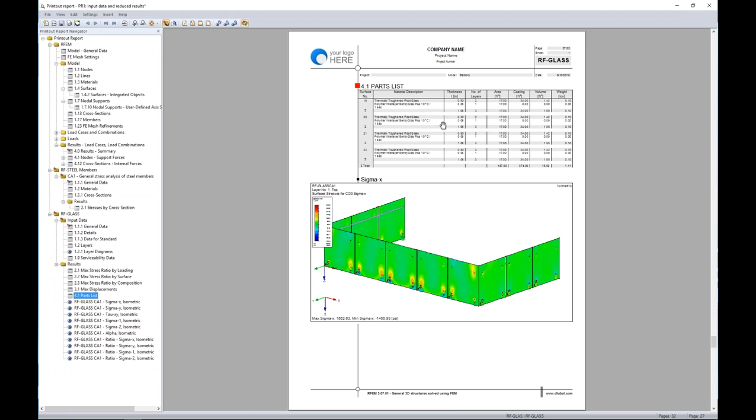I think our printout report is one of the strongest features, especially in comparison to a lot of other programs you're used to. It's laid out very nicely, and you can see the pictures were automatically put in based on all of those different stresses. So I can jump through them in the table of contents or just view them graphically, and everything was automatically put in there.

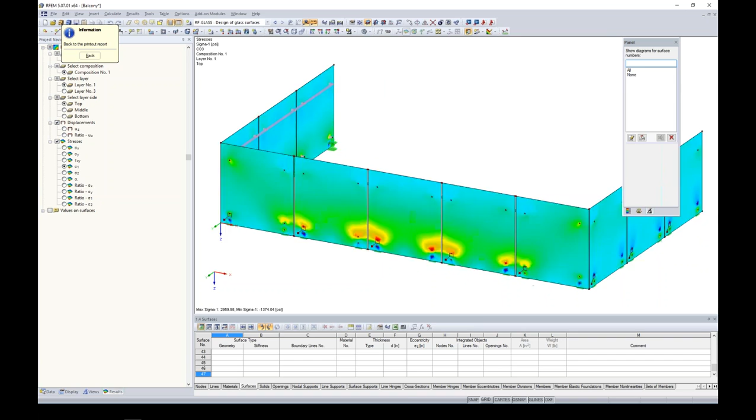Let's say for this one I don't really like that view. I can click on edit, change the view to maybe a front view here, click back, and the printout report will automatically be updated with that new view, as you can see. The other important thing to note is if anything were to change with your model—say a loading, or you rerun an analysis—these pictures all update automatically too. So you don't have to worry about going back and reprinting them again if any slight change was made. That's something really nice about our printout report.

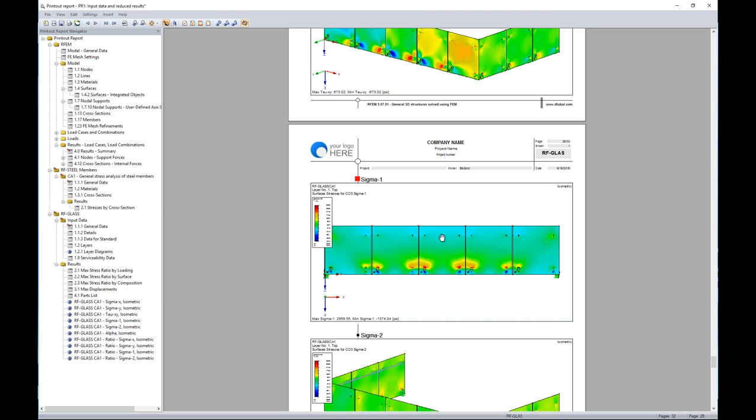Okay, so going back to the PowerPoint, we can sum up today's webinar.